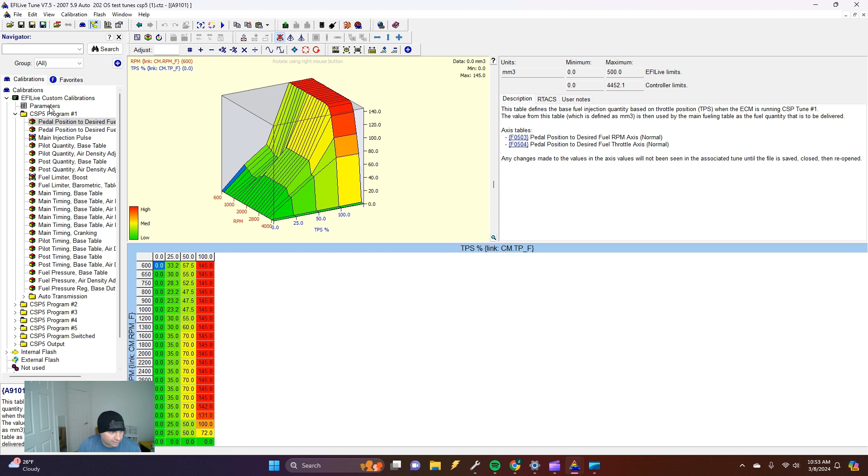Right off the bat, this has been modified. This has a CSP5 switch in it. This is a 5.9 Cummins. This is an 07.

Anyways, moving on, the pedal position desired fuel table. This is just factory. You could modify this table if you want. I think I usually set them at like 200. You don't want to modify the 0, leave the 0 at the 0.

Moving on, injection pulse width. This is the main table you're going to be playing with to get any fuel out of these things. Most of the stuff I do, and most of the stuff anybody should be doing, is just focusing on these 6 cells here, unless you have big injectors and all that stuff. But if it's a stock injector truck, you're really going to just be focusing down here on these 6 cells, and maybe all these cells.

But you want to have the engine spun up before you start adding fuel. How this table works is it's based upon microseconds, and this is how long the injector is open for. So at idle, you're going to be hovering around this area, and at wide open throttle, you're going to be hovering down in this area.

I usually stay at 2,000 or around that area for a 100 horsepower tune. If you want to go higher, you can, obviously people like power. I never go above 2,950. 3,000 is max, I suggest that you don't go higher than that.

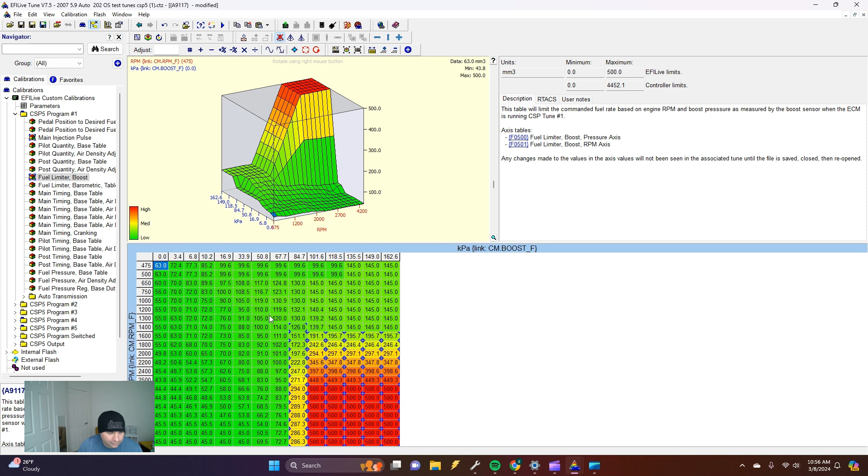So moving on, you got this boost limit here. I was just kind of messing around earlier. You can max this out, or make it to 200, whatever you want to do. But I'm sure that this table has an effect on boost. So if you're running a really big turbo and you're wanting to push 70 to 100 psi with twins or whatever you want to do, compounds, you probably have to play with this table.

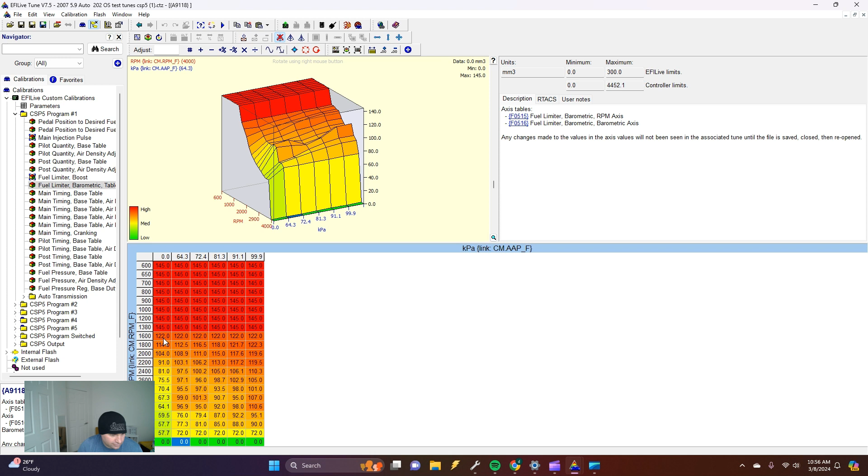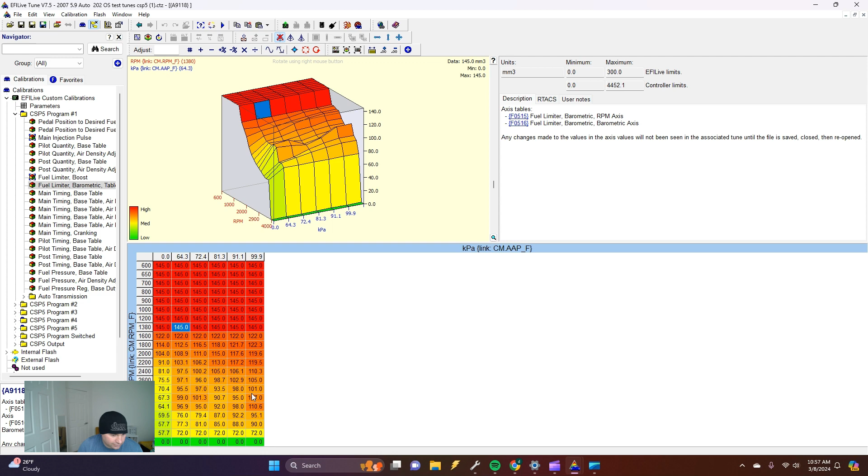Moving on, this table here is kind of a limiter too. You can raise these values. Probably set them all at 145, or you can go to 190 or whatever you want to do. The maximum is 300. I'm sure some people just max them out, you can run whatever you feel comfortable. You can try this at 145, but if you leave this stock and you floor this vehicle, this thing will not make the power that you're looking for. So it's best to just set the thing at 145 to start with, and if you want more than that, then just do what you got to do.

Main injection timing. This is, I don't know if this is a Smarty map or where this thing came from, but I think this is factory.

Smarty kind of does the same thing. I think this might even have a Smarty map in the different ones, but sometimes when you pull a file out of a 03 or 05 Cummins with HP Tuners, it will already have a Smarty file in it, because HP Tuners gives you like a factory file for them. Anyways, for whatever reason, sometimes when you pull the files out, you'll get like a Smarty map or whatever. But anyways, it kind of looks like this.

And all it is, they're using the stock thing and just throwing a bunch of timing in it. But I think usually they put just something crazy like 10 or 18 degrees of timing down here. Smarty was not the greatest tuning for the 5.9 Cummins, but it's not too bad nowadays, I don't think. But when they first started out, definitely very smoky, lots of timing, not great.

This is not how I make my maps. The Cummins like negative timing, these 5.9s, especially when you're in altitude. Until the turbo gets spooled up, you do not want a bunch of timing in it. Even little bits of timing will create smoke. Get the turbo spooled and then start adding your timing. But right now for 10 degrees, 11 degrees, this is probably fine for an 80 horsepower tune.

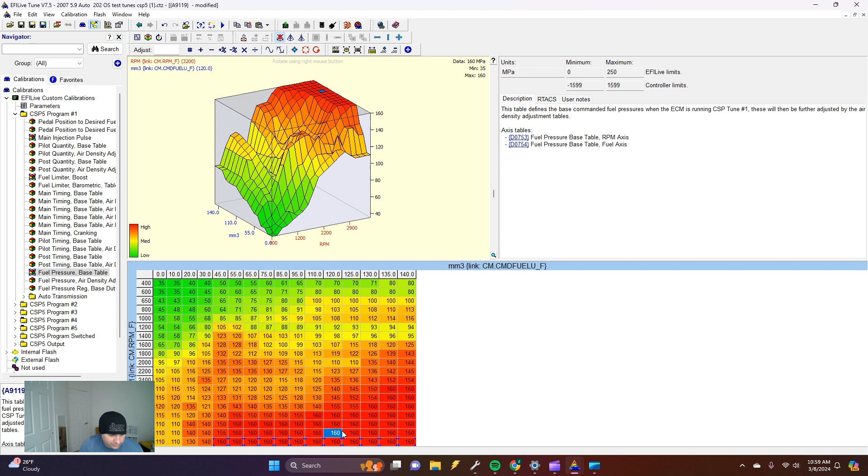Fuel pressure, 160 is equal to 23,000 PSI usually. So right away, I mean, you could go down here and put this to 160. You're not gonna hurt anything. I don't know why they do that from the factory, but you're probably not gonna rev your engine to 3,500 anyways. It's gonna shift, and you're probably gonna shift in this area here, but whatever. I just like to keep the fuel pressure up there.

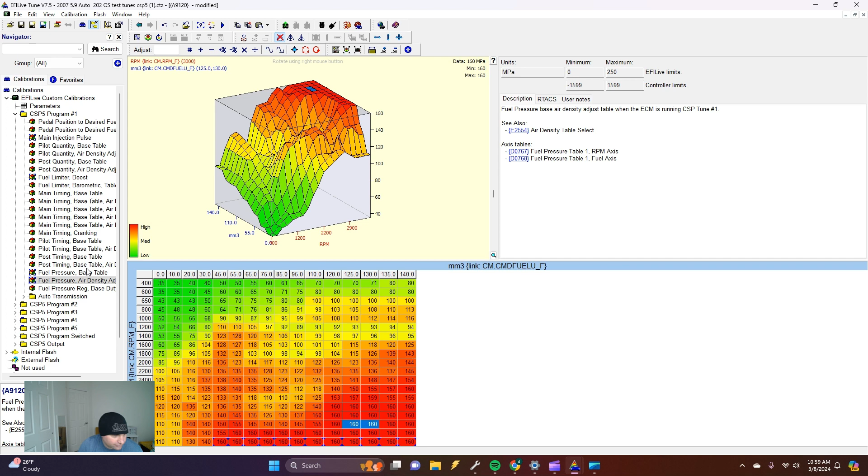Moving on, this is the same thing. You'd want to go back through here and type 160. You can smooth this map out way more and get it so it doesn't have all this jagged stuff. I mean, like I said, this is just a factory map. Usually the fuel pressure regulator base duty cycle, I don't mess with this at all. Leave that alone unless you research how to mess with it.

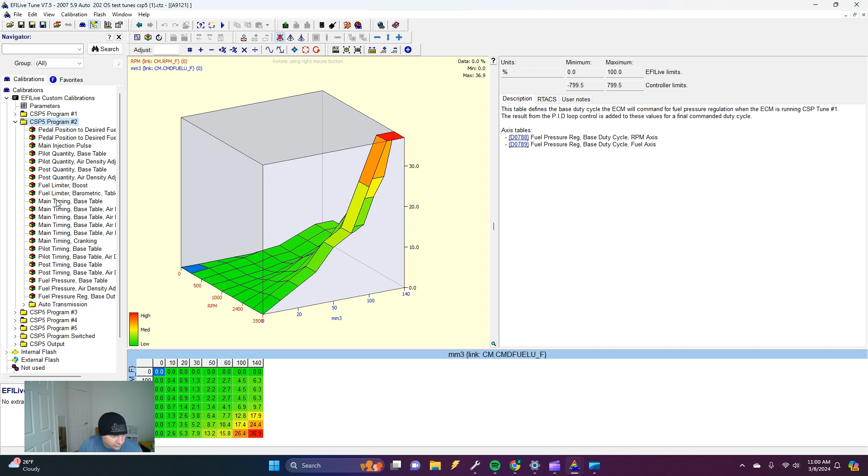I'll just jump into this tune real quick and kind of show you what my timing map looks like when it's all smoothed out and done for an 80 horsepower tune or 100, whatever.

That was only like a 1% increase, but anyways, usually, I mean, you can run 15 degrees. I usually, if you're going to run 15 degrees, I would probably just stay at 3,000 RPMs when the engine's spooled up. When the turbo's spooled, engine's moving, all the parts are happy, then you put the timing in. Because if you put it in too low, a lot, it's going to be smoky, and it's hard on the rod bearings and hard on other things in the motor. So maybe not do that.

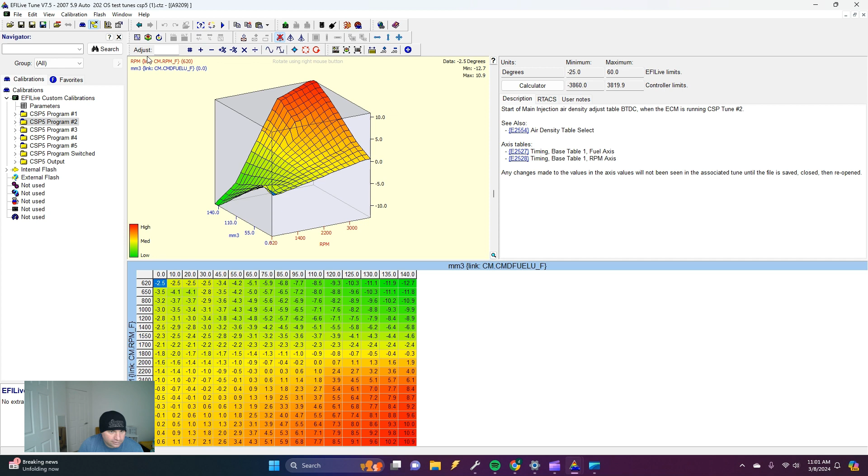Okay, hold on, I think it went to the wrong one. Here we go. So this is an 08 truck, 6.7, 68 RFE tranny.

So right off the bat, this doesn't have the CSP5 in it, so we're just gonna have to go to internal flash, injection quantity. These are those pedal things again. This is just more resolution. Again, I think I have set these 200, been fine. Mostly it's just like throttle pedal feel.

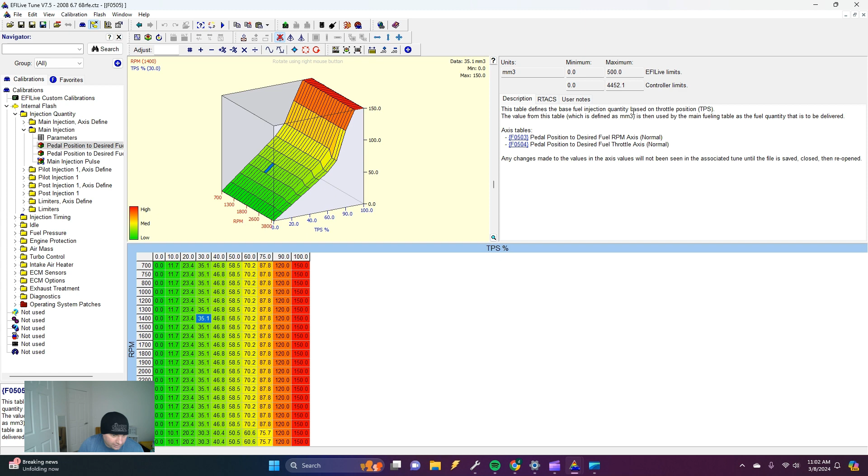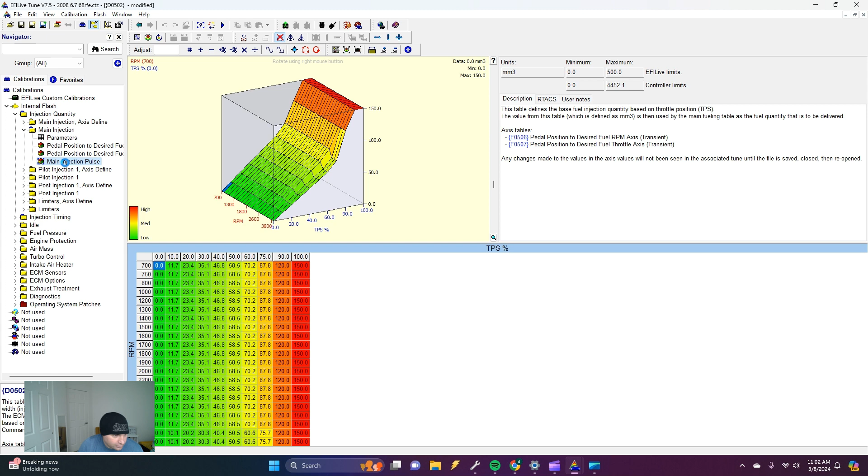You can leave it alone, play with it, but you could raise a little bit up here, more maybe at the higher RPMs. You know, do you. But moving on, this has been modified. I think I just added 10% down here. So we're about 2100 microseconds.

And it seems like a really nice map. So go from there, and it'd be a good starter tune. Probably the 100 horse tune, and like I said, you can increase. I usually never go above 30 degrees on these motors. The 5.9, the 6.7s, all about that 30-degree mark I feel is when they're done.

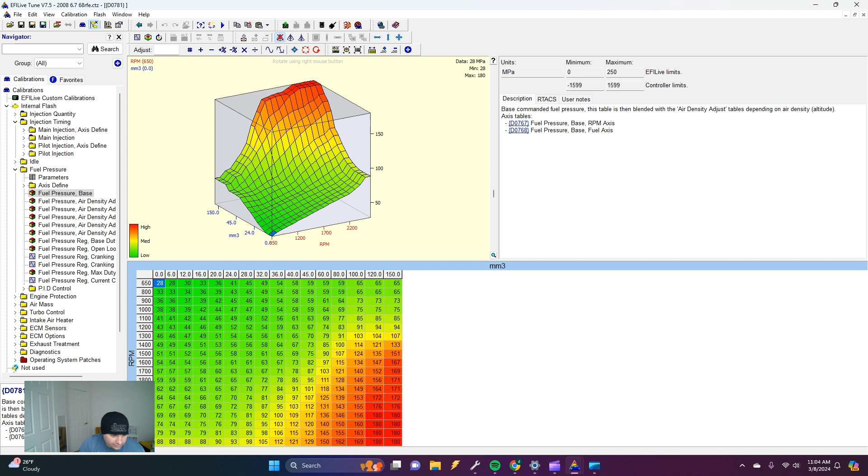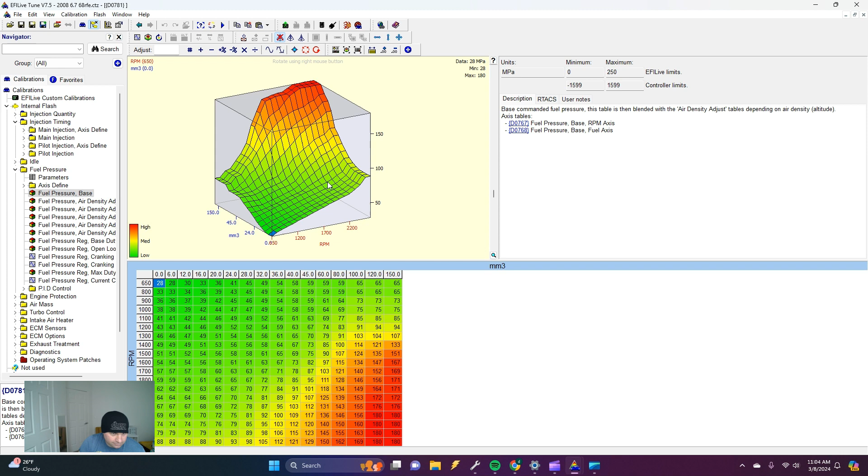Yeah, so we'll drop in the fuel pressure, show you the difference. So these trucks have 180 MPa factory, so they run 26,000 psi, and they don't start adding fuel pressure till you're pretty wide open and at 2200 RPMs when the turbo is spooled. So yeah, I usually just leave this table alone. It's pretty smooth and pretty usable. So really no reason to mess with it.

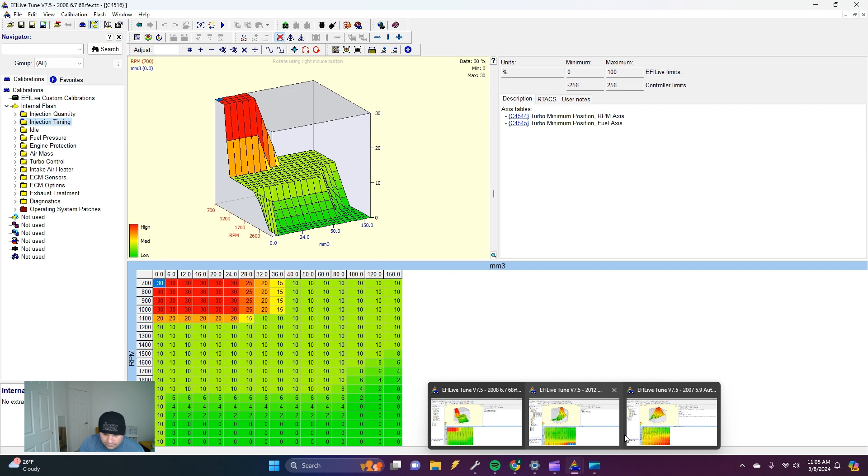These have turbo control, variable vane. Usually I don't have to mess with these. Pretty decent. Once the turbo is spooled at wide open throttle, it closes the vanes and you're good. So if you have an aftermarket turbo, you could mess around with this a little bit. But yeah, that's pretty much it for this '07.5 through 2009. We're going to go to the CM2200 now and look at that. So I haven't messed with too many of these, so just going to have to see what happens here.

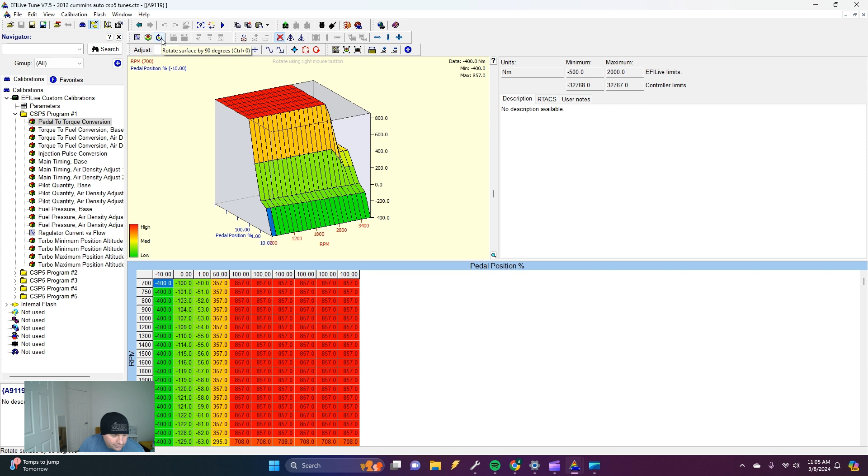Okay, so this is your pedal torque again. It says pedal position, so you could probably leave this alone. And this has probably been modified already too, so I don't know if I have a stock one. This could be factory or it could have been modified, but something to look at. Torque conversion tables.

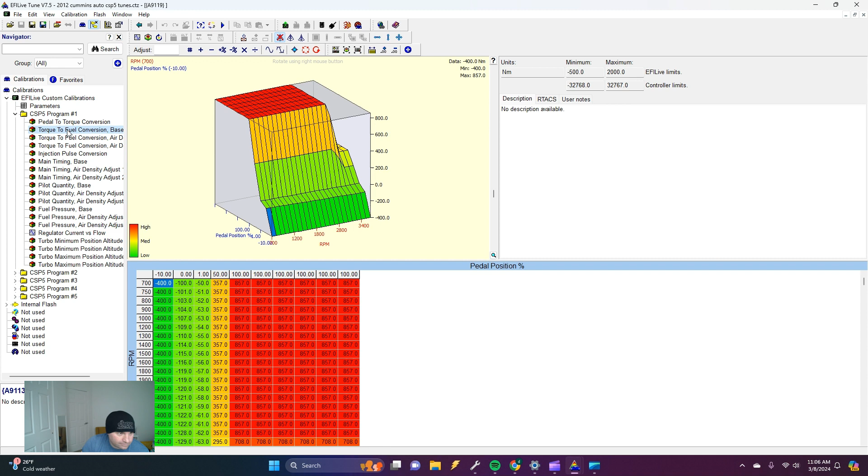I don't tune the 2010 and newer trucks just because every year these things become harder and harder to tune, and they become a pain in the ass. You don't get the files anymore. You can't pull them out of the computer, so you have to call someone or take the computer out of the truck and bench flash the thing. I just never really cared to tune these trucks. I have tuned them, just done little stuff, and it's worked out kind of, but there's just a lot of tables in these things, and more and more torque limiting stuff, more pain in the ass to get everything else to work right and do what you want it to do.

So this is an injection pulse conversion table is what they're calling it, but this is your pulse width table. And right off the bat, I bet it's not even hitting these cells. It's probably hitting these. So it's running 1800 to 1700 µs at wide open throttle. And then we have 17 degrees, which ain't too bad. That's a lot of timing for a factory engine, in my opinion. That's how Cummins is making power with these things, they're just adding more timing.

If you were to open up a Duramax file, like an LML, I think that they're like 15 degrees maybe, and then they have bigger injectors, so they only run like, I don't know, like 1,000 pulse width. So this thing's already at 1,700, and that's not too bad. That's kind of where the factory, whatever.

I mean, the LB7 Duramax used to run like 14 factory, but you know, every year they just keep cranking the pulse width up and the timing to make these things work right, give them the power that they're supposed to. And the 10 through 12, I think they're like 400 horse or something. But yeah, so just the same thing over.

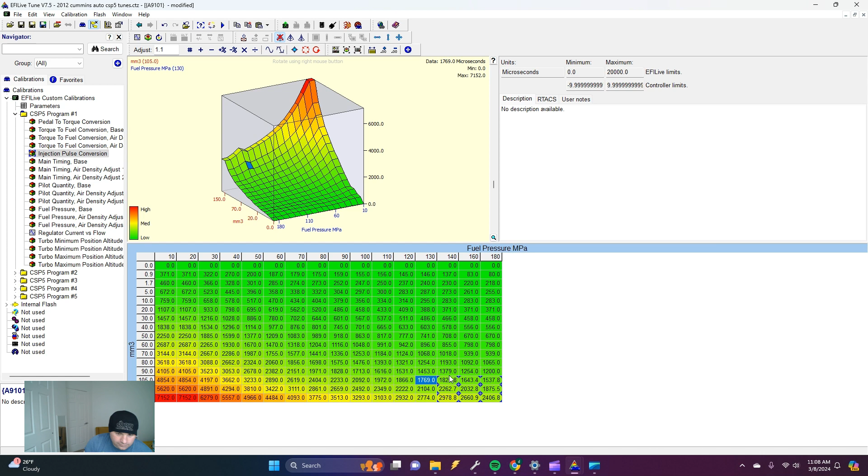You know, if you want to raise these values, I would go down into these cells here and I would add 1.1, 10%, and then interpolate. Go this way, interpolate.

But as I was saying, you could probably add all the timing you want on these engines, and it's still not gonna do what you want it to, because there's just so much stuff messing with you to get the thing to be tuned right, you know.

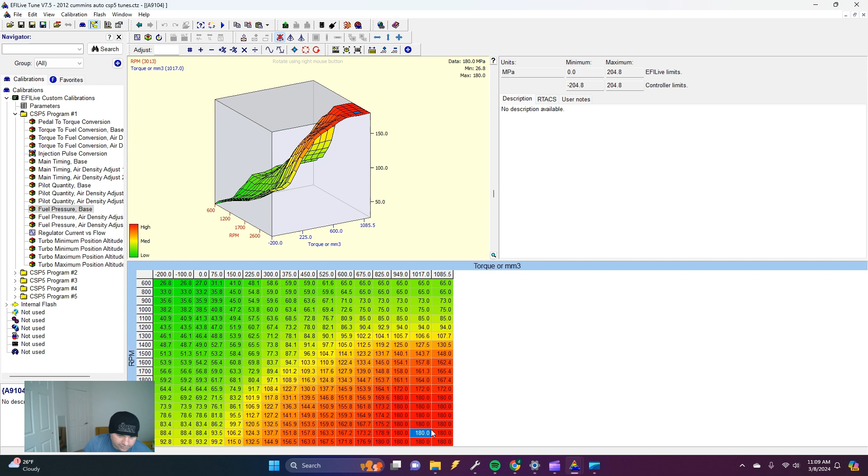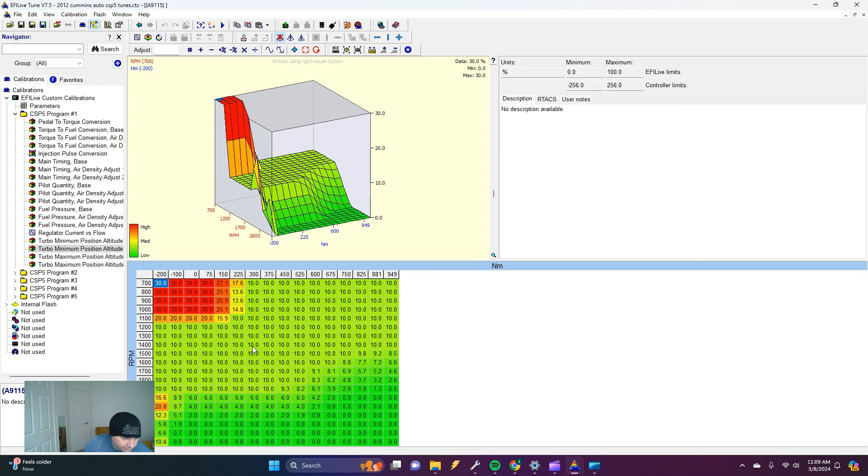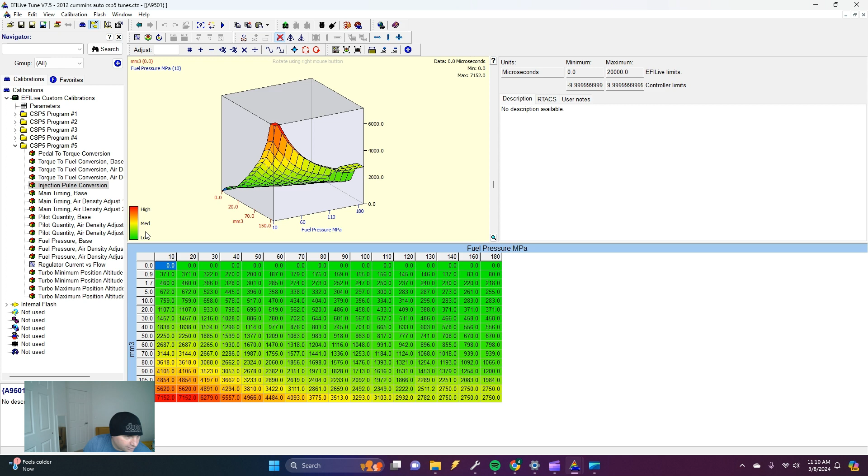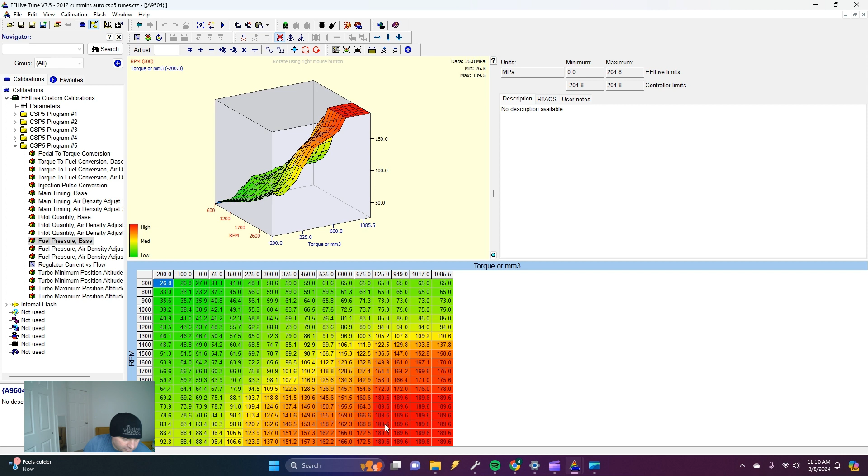So let's see what else we got going on here. Okay, that's at 2200. Base is at 20. Let's check 5. 2,700 and 28 degrees. So yeah, that tune would run pretty well, I'm sure. But probably ain't gonna run that great without, yeah, and see, this has been raised to almost 190 for no reason.

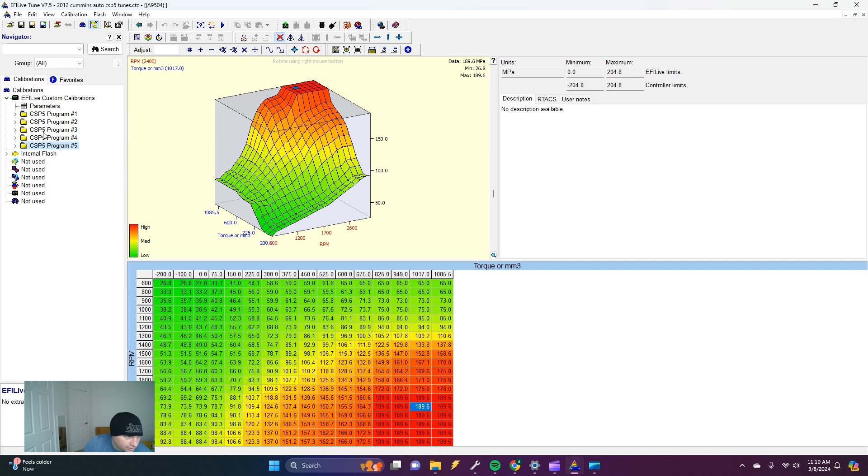Because there's limiters, obviously. If you go back into here, torque limiting. These are just RPM limits. And you have all these axis tables. This is a limitation here. So if you think that this needs to be high, I would put this right at whatever these numbers are here. So you could go 1100 right here and do like 1100 here or even more.

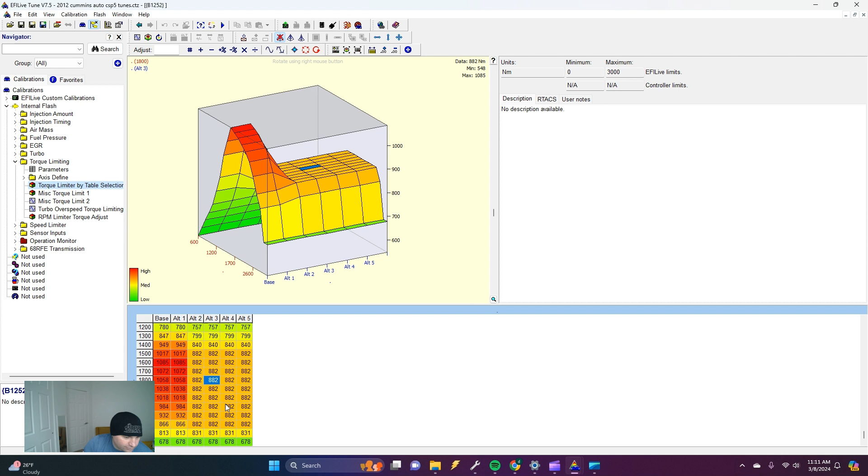Because I mean, these things already make 1,000 foot-pounds of torque, or 1100 if you start playing with them. You're going to need more for sure. If this isn't played with, then it's going to just pull the pulse width back and the truck isn't going to run like it should. Turbo overspeeding limit, RPM torque limit.

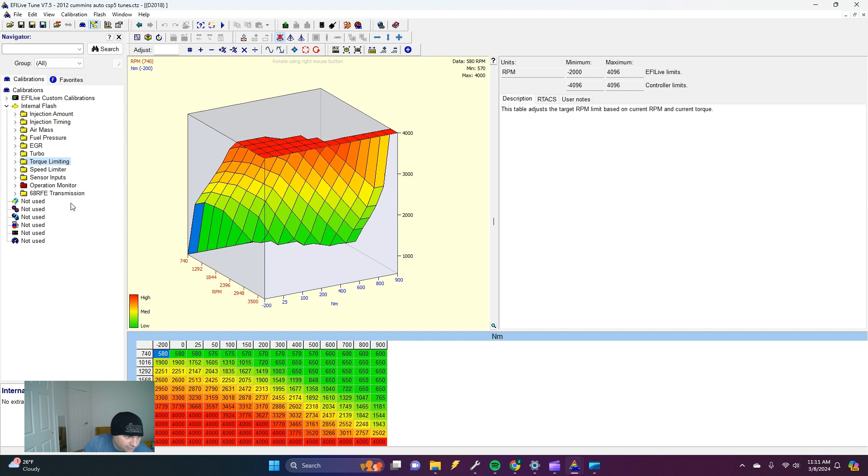You know, I know that I could tune these things. I just don't, like I said, there's just no way to support the files. And with the EPA stuff, all that, I'd rather just not deal with it at all.

The 68RFE transmission, I wanted to make a video on this anyways, line pressure. These transmissions suck at running line pressure, and you sit at idle and they're like 60 psi, and you got to almost push the damn throttle half throttle before it goes up to 120. Feel like, but that's the ramp rate. Here's some gains.

Neutral. I don't know why I fucking do that shit, but you can play with this line pressure gain, line pressure max 1200. This is kPa. So if you can convert kPa to psi, that'll give you whatever this line pressure is. You can play with this, but it's not going to do anything.

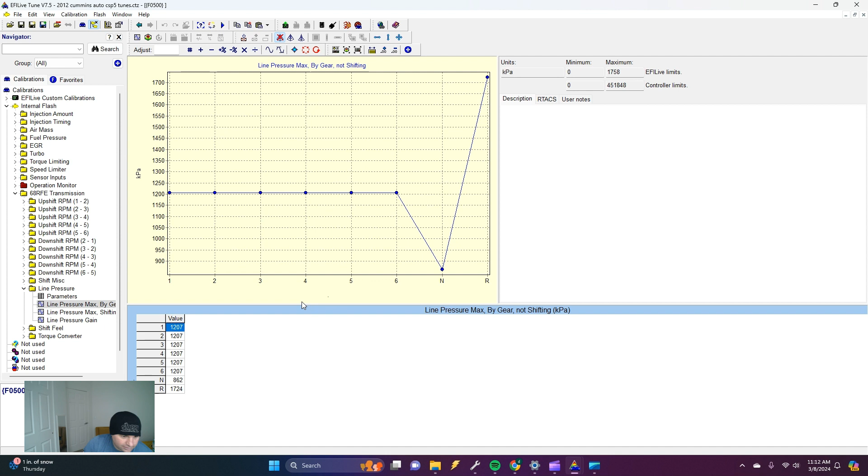You need to go into the transmission, and you actually have to drill a hole through the channel plate and buy a different separator plate to get these things to raise line pressure. But after that's done, then you can raise the line pressure to whatever you want. But these transmissions already are kind of weak, so you need to have tuning on them.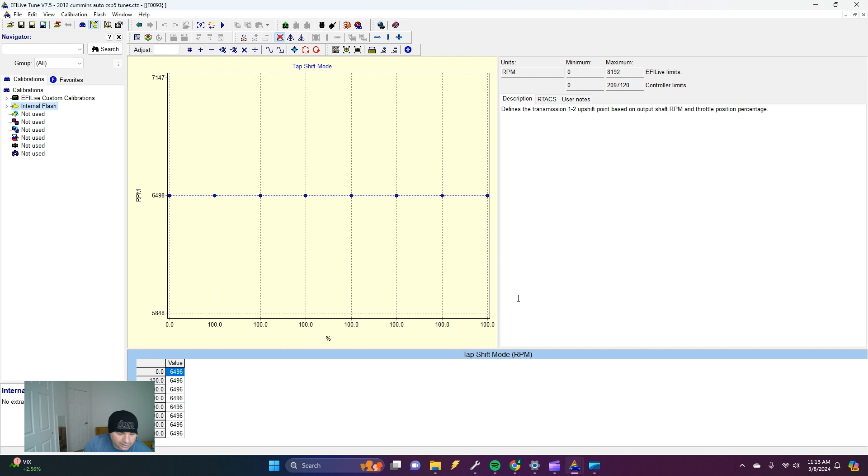Billet channel plate, Sonnax accumulators, is a really good upgrade for these things. Makes them shift like an old 48 that has a shift kit in it or something. And tuning, it just makes them so much better. But yeah, that's pretty much it. Just wanted to kind of go through these three, 5.9 and the 6.7s, kind of show people what